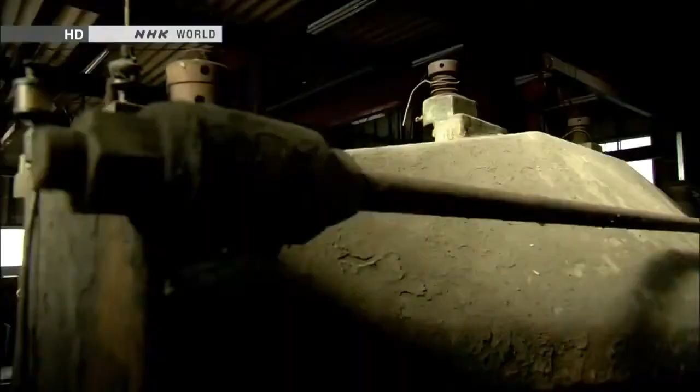The future is just around the corner. In a workshop near Mount Fuji, a curious being has appeared. It's 3.8 meters tall and weighs 4 tons.

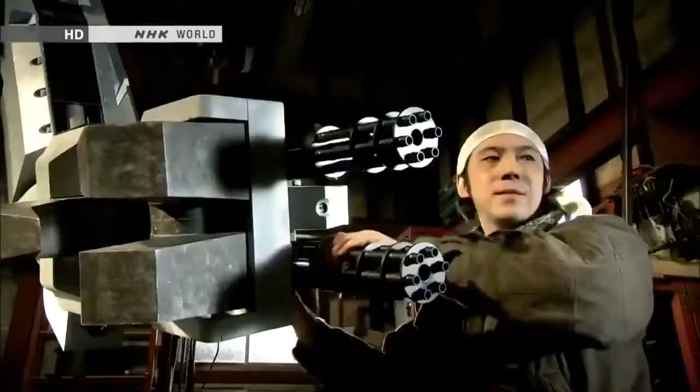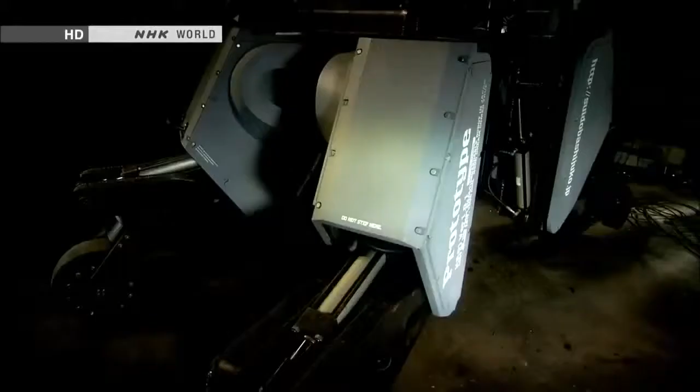It is a giant humanoid robot named Kuratas, a contemporary artist's creation. He holed up here for 2 years, building the robot with input from an expert. He calls Kuratas a work of art, but it's a sophisticated piece of machinery. A person seated inside can control the robot, move its limbs, and grab things. The artist says he was inspired by robots in science fiction tales and animation. That vision sustained him as he worked in solitude.

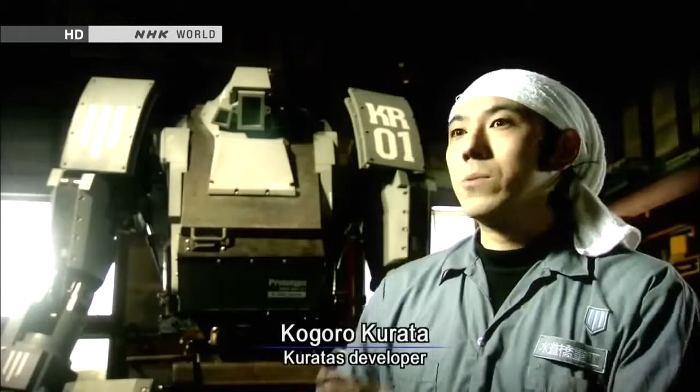Things that were once unthinkable are becoming real. How will robots evolve? Well, military applications could be one option. They'll probably become more and more like humans. They could surpass us in strength and ability.

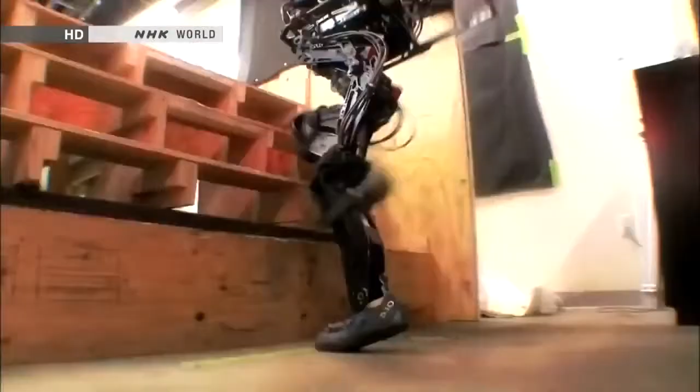People long dreamed of creating these extreme machines. Now, humanoid robots are here. They think like we do, move like we do, and even sacrifice themselves for us.

We want our robot to change society, because robots must be useful. Electronics and computing, progress in vision systems, there's many pieces of it. We will see much more capability continue to grow.

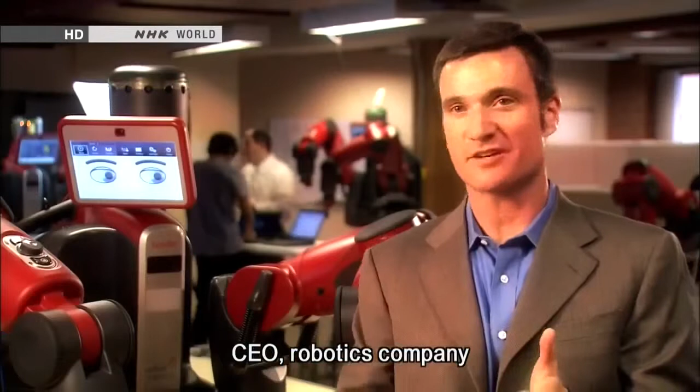Since the Industrial Revolution, people have entrusted some jobs to machines. But there may come a day when humanoid robots do much more complex jobs. Then, what will people do? You'll see more and more robots doing things in society, whether it's manufacturing, service applications, or home healthcare applications. The key will be to skillfully divide labor between humans and humanoid robots.

The disaster that hit Japan in March 2011 accelerated efforts to develop robots with human traits. The Fukushima nuclear accident left people powerless. Robots can take over when things become dangerous.

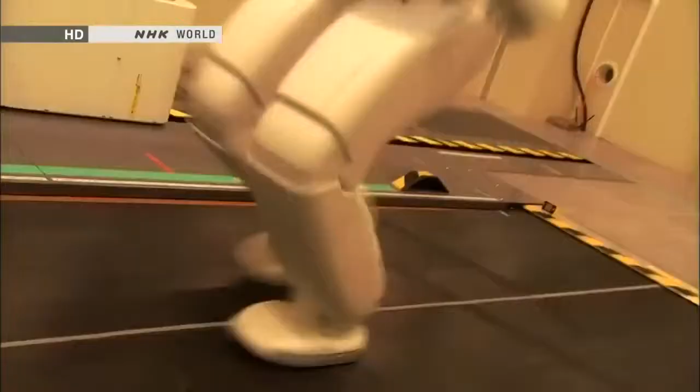They can plow through rubble, climb ladders, even make repairs. People are turning to humanoid robots to handle all of these tasks. We're eager to launch it soon to end the crisis. By joining forces, we can make a truly useful contribution.

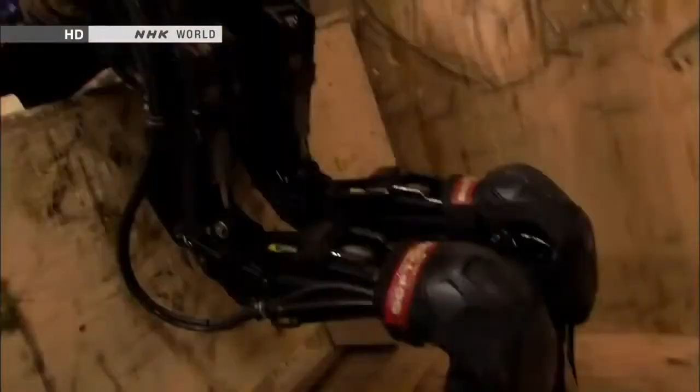Only a humanoid could do it. The day will come when robots will really assist mankind. The nuclear disaster in Japan sparked explosive advances in humanoids at the front line of robotics development. This program explores the future that's fast approaching.

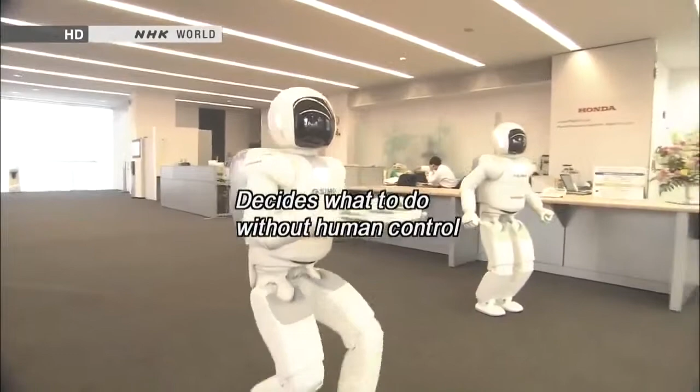ASIMO was created by Honda's research and development subsidiary. We were allowed to film their top-secret robotics laboratory.

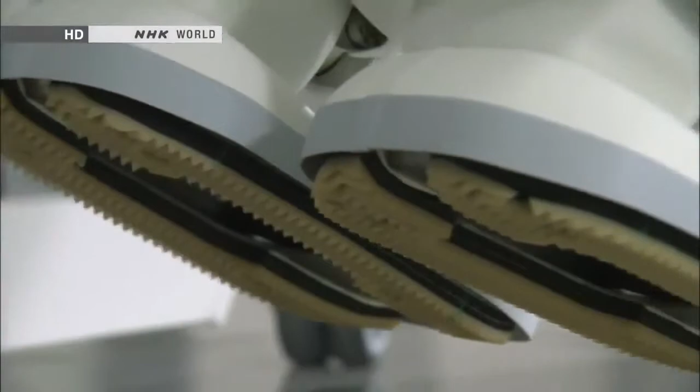Japan is a worldwide leader in the development of humanoid robots. ASIMO is the country's crowning achievement. Engineers continue to make improvements.

ASIMO's most innovative feature is its advanced intelligence. The robot can think and act on its own without human intervention. That's made possible by sensors that replicate our 5 senses.

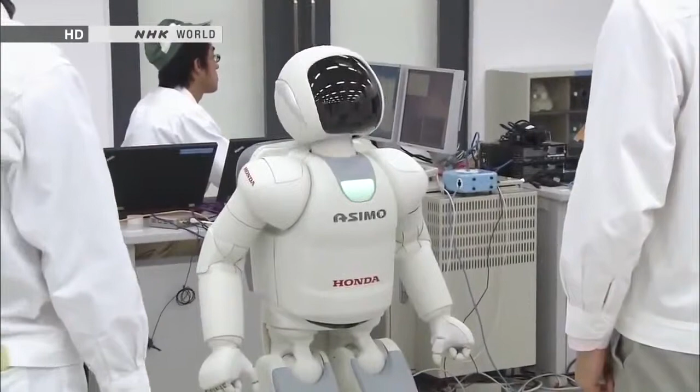ASIMO's head contains 8 microphones. It uses them to listen and engage in conversation.

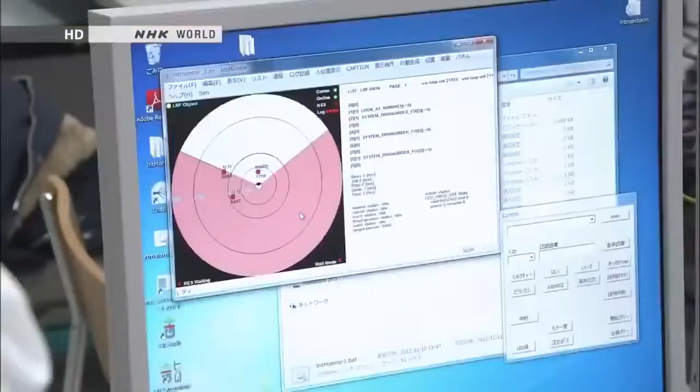ASIMO's artificial intelligence analyzes a vast array of information. That's how it understands people's requests and takes appropriate actions.

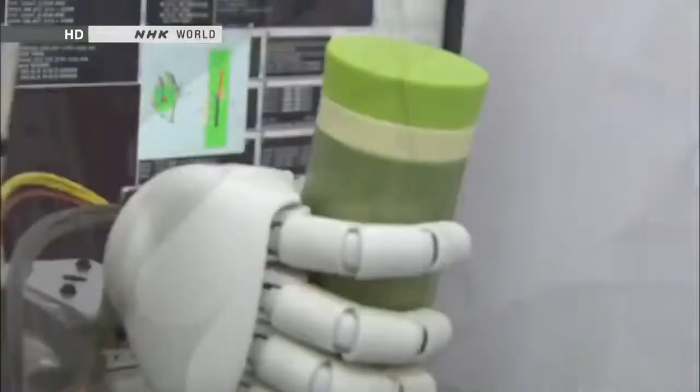ASIMO also has a sophisticated sense of touch. Its fingers can make subtle movements, like a person's. Sensors are embedded in the fingertips, too. They can gauge the hardness of an object, like human fingers do.

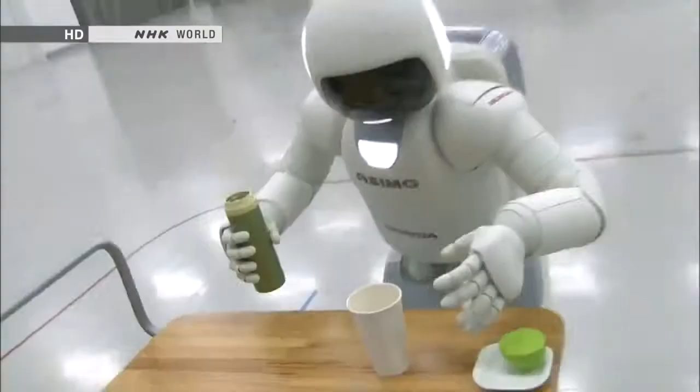Most robots use a fixed amount of strength to grab things. But ASIMO exerts more power to open a tightly sealed water bottle and less when holding a paper cup. Its artificial intelligence uses information from the fingertip sensors to adjust the grip.

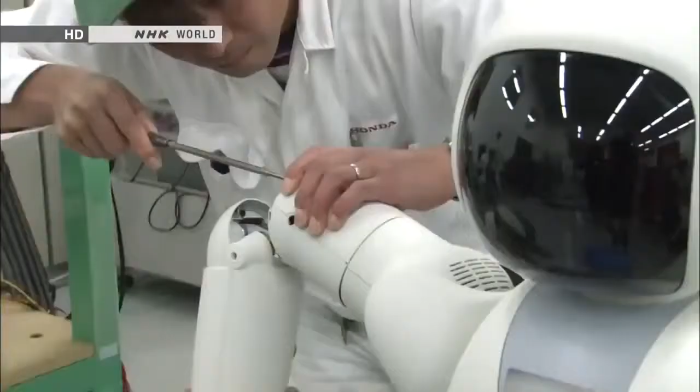The developer's ultimate goal is for ASIMO to be a valuable partner that coexists with humans. The engineers who created ASIMO all grew up watching animated shows about robots, such as Astro Boy, Doraemon, and Gundam. They dreamed of someday making their own.

Satoshi Shigemi is the development team's leader. He has been designing robots for the past 16 years.

From the beginning, we wanted to design a robot that could help people. To realize that dream, we're constantly asking ourselves, what kind of robot would be able to change society, make people happy, and make life easier for people around the world? Our idea is to create a robot that will change how people live. We're working through the technological issues, one by one, in order to reach that goal.

ASIMO's advanced physical capabilities are revolutionary. The robot can walk and run. It can reach speeds of up to 9 kilometers an hour.

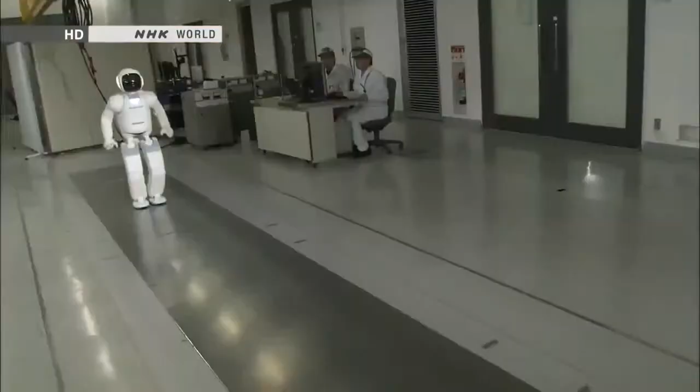For robots, walking is much easier than running. When running, both feet momentarily leave the ground. Balancing in mid-air is no easy task.

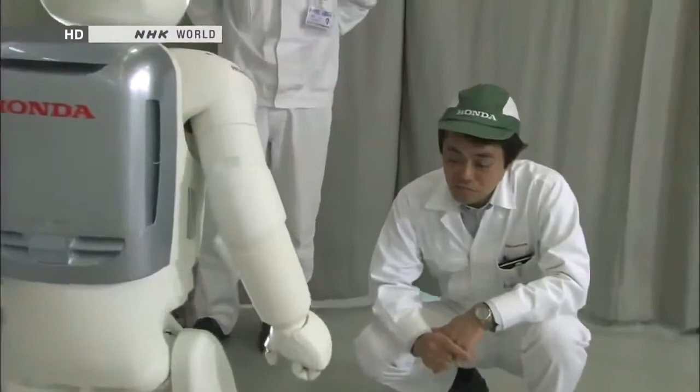Maintaining posture while jumping or floating in the air was a major technological breakthrough. ASIMO leans its upper body slightly forward to maintain overall balance, and goes forward straight in the air.

Sensors in ASIMO's waist measure the robot's angle. It leans slightly to compensate, forward or back, side to side. That's how it stays perfectly balanced in the air.

ASIMO has been evolving ever since development began in 1986, much like a growing child.

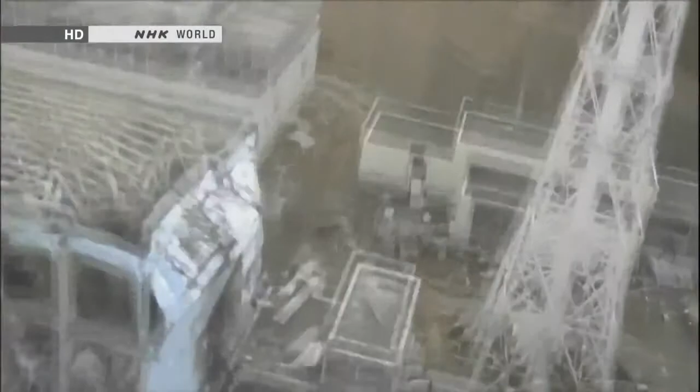But something happened that made researchers realize ASIMO's real-world limitations. It was the accident at Tokyo Electric Power Company's Fukushima Daiichi nuclear plant. The damaged reactors released radioactive substances, making it difficult for humans to deal with the crisis. People needed something that could confront the dangers and bring the plant under control.

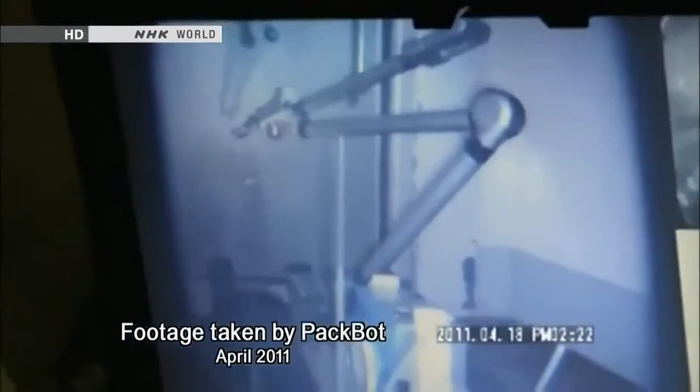Robots. Japanese officials sent a request for robots developed by the US military. The robots were sent to Fukushima in April 2011. They recorded images inside the damaged reactors.

Since then, a variety of Japanese robots have been enlisted as well. Robots have proven to be useful, but two years after the accident, they're only used for inspections. They're not able to do all the work of humans.

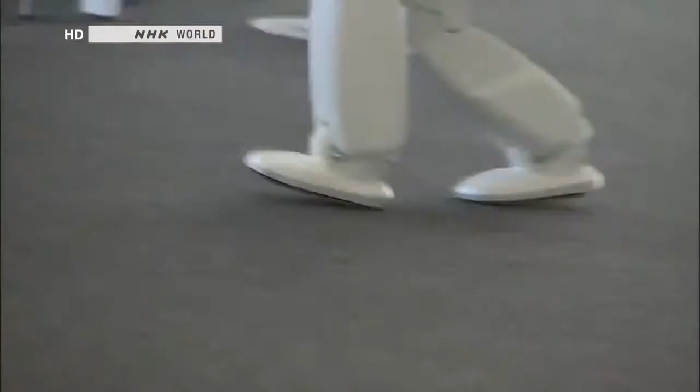What about ASIMO? Right after the disaster, people flooded Honda with phone calls and emails asking the company to send ASIMO to the Fukushima plant.

But ASIMO wasn't up to the task. It could move nimbly over an office floor and other flat surfaces, but large vertical gaps and obstacles were a different story.

We heard from many customers. We ourselves regretted that ASIMO couldn't be of help. It was obvious that the ASIMO we had built wasn't ready for real-life action. We realized right away that we needed to make something different, something new that could offer immediate assistance.

Honda wasted no time. Company officials offered to create a robot free of charge to assist TEPCO in the recovery. TEPCO accepted, and officials asked for a robot that could open or close valves inside the nuclear plant.

We wanted to flush out radioactive materials that remained inside the pipes and bring down radiation levels in the facility. That was our first goal.

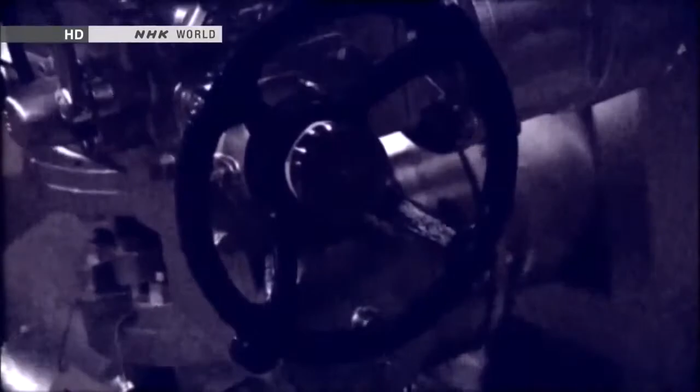Unless we opened or closed the valves, the area would remain highly radioactive, and that would prevent workers from entering the facility, and impact the entire decommissioning schedule.

How many valves are there? Each unit has from several thousand to tens of thousands of them.

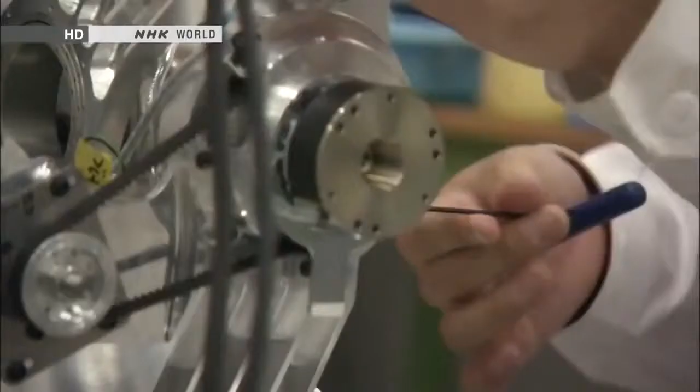In July 2011, four months after the accident, Honda began designing a robot for use at the nuclear plant. Members of the ASIMO team were put in charge of the project. A humanoid robot would take too long to build, so engineers focused on making a robot specifically for operating valves.

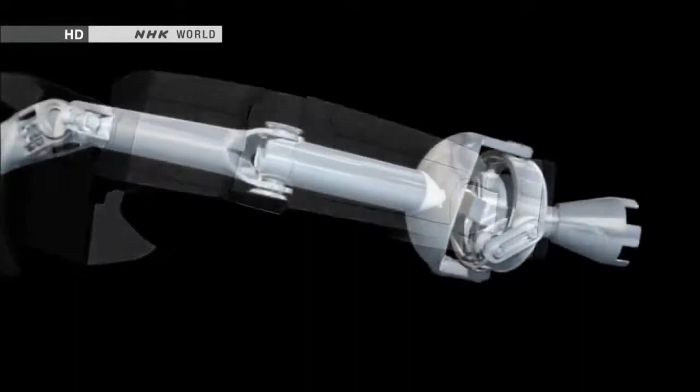ASIMO was crucial to their efforts. Its ankles employ advanced balancing technology. Developers reasoned that using it would allow the new robot to work inside rubble-filled reactor buildings.

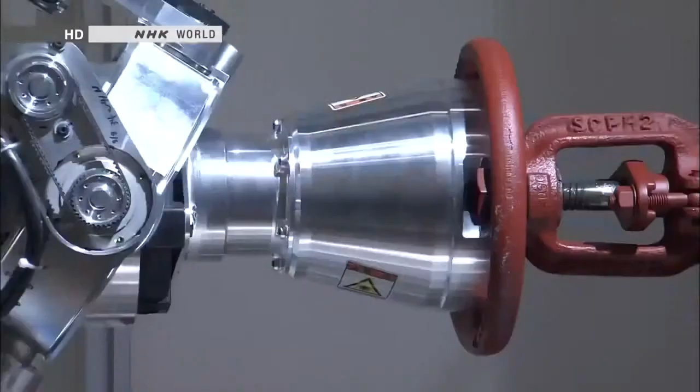The team worked exceptionally fast, completing a prototype in just four months. They turned ASIMO's leg into an arm for operating the valves.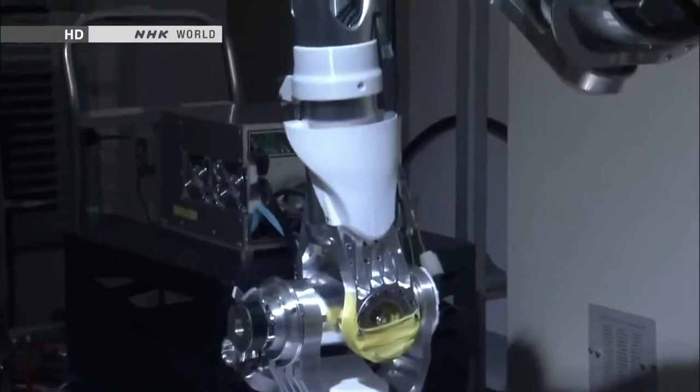Even when the base moves, the arm remains steady. So far, so good.

Officials from TEPCO evaluated the prototype at the National Institute of Advanced Industrial Science and Technology. The government-backed group for cutting-edge research contributed to the development effort.

A TEPCO official couldn't take his eyes off the robot's movements. We may be quite demanding. That's okay. We might be quite direct.

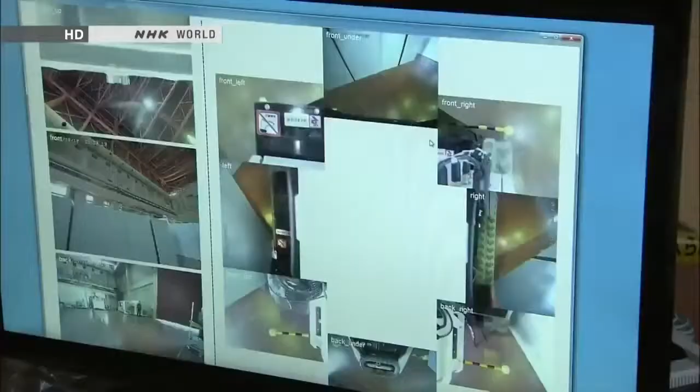The test is designed to replicate conditions inside the nuclear plant. The robotic arm is remote controlled. Testers send the arm toward one of the valves.

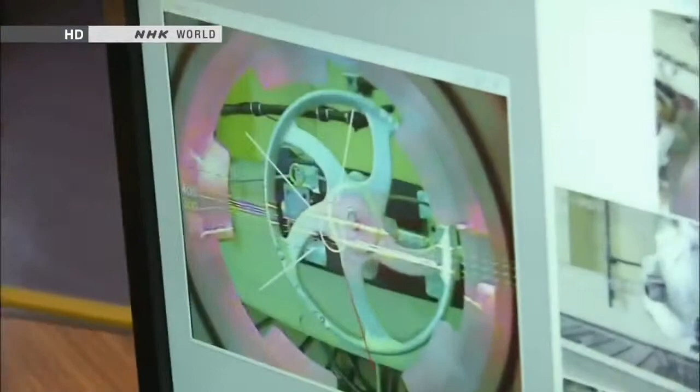There are a number of unknowns, including the condition of the valves. They may have rusted since the accident. A valve might break if the robot applies too much force, or it might not budge at all.

The robot uses just the right amount of force and turns the valve on the first try. It's passed the test.

This robot can do more than inspections. It could help in the recovery effort.

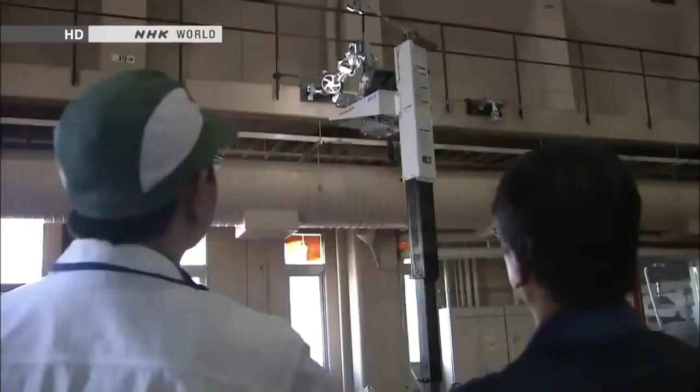From what we've seen, the robot seems near perfect. We want to use it as soon as the need arises. It's important that we quickly do what we can to make that possible.

The Fukushima accident also encouraged U.S. developers to design emergency response robots. Department of Defense officials have spearheaded the effort. Before, they had shown little interest in humanoid robots. Now, they view them as vital for disaster response.

The architect of the new strategy is Gill Pratt of DARPA. He oversees funding for leading-edge research at the Department of Defense.

There are many aspects of disaster response in Fukushima that inspire people in robotics to work on new capabilities. If they were able to take action during those first 24 hours, then the first reactor maybe would not have blown up in an environment that is too dangerous for a person to do.

What's important to us is that the robot is compatible with human environments, compatible with human tools, and also compatible with human operators without special training. As a result of that, the easiest form that comes to mind is the human form. DARPA is backing the development of a humanoid robot for catastrophes, such as nuclear power plant accidents.

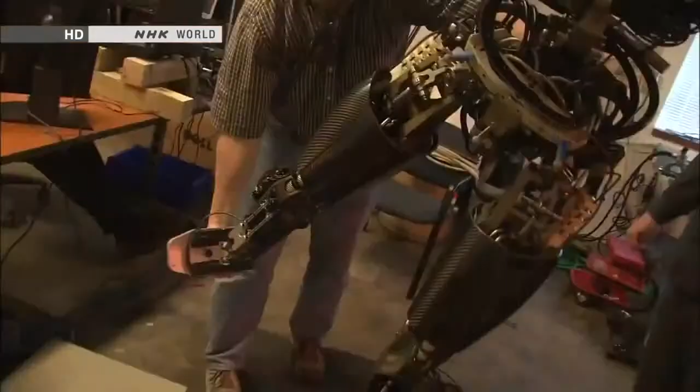This is the first American-made humanoid robot for disaster response. It's called Atlas. Before, U.S. designers had focused on robots with specialized functions.

Why the sudden interest in humanoid robots? Traveling over debris, prying open valves, using tools for repairs. Performing multiple tasks like these is impossible for specialized robots. Crises also require robots that can navigate doors and stairs. Humanoid robots are ideally suited for such situations.

Tests of this prototype were going smoothly. It can easily climb stairs and jump from a height of nearly 1 meter. It can negotiate obstacles using its arms and legs. It can already handle more demanding environments than Asimo can.

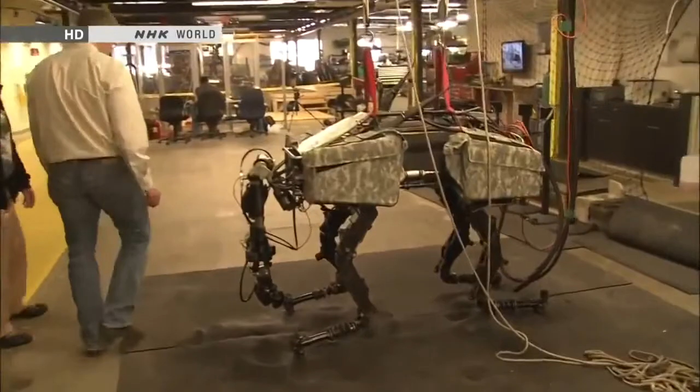Atlas is loaded with technologies originally designed for military robots. A quadruped robot called Cheetah can race through a battlefield at 50 kilometers an hour. LS-3 is for transport. It can carry heavy supplies for soldiers.

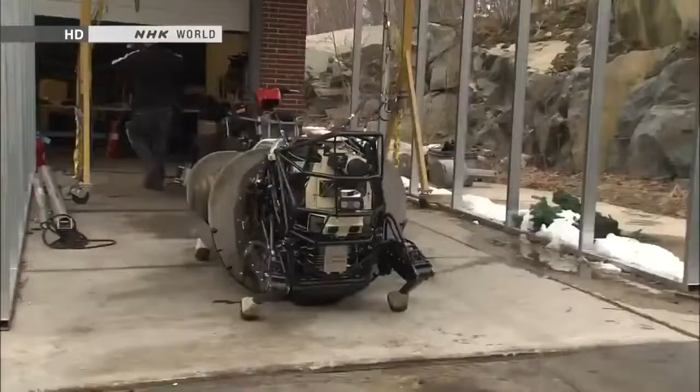The ferocious-looking robot gets its strength from a powerful hydraulic drive system. A hydraulic device can be small, yet quite strong. The black cables convey hydraulic power to the legs. That generates the brute force required for harsh conditions on the battlefield.

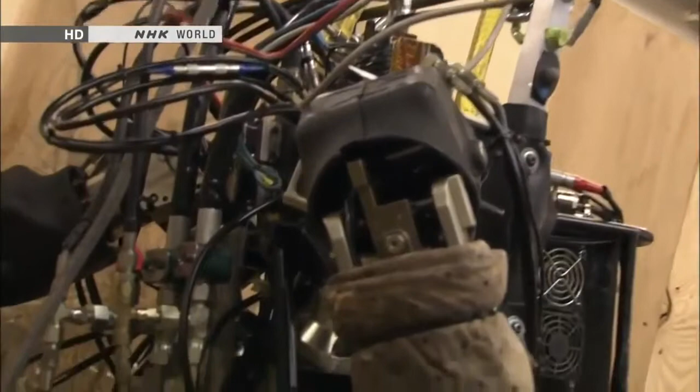A web of hydraulic cables covers Atlas's body. They form a muscular suit of armor for clearing debris.

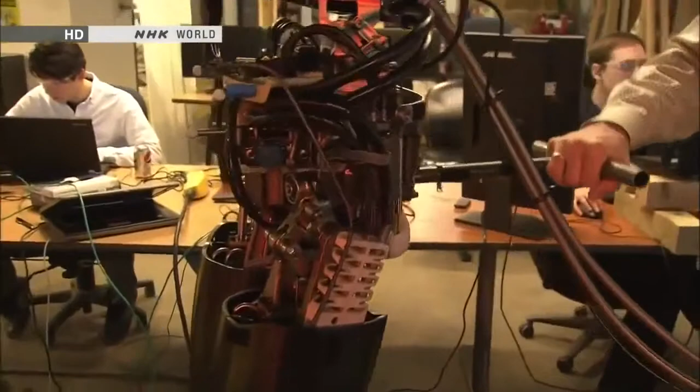Another important technology comes from military robot engineering. This machine's joints have a wide range of motion. They allow for flexibility that humans can't achieve. Atlas's joints are capable of moving in 28 different ways. Atlas can crawl through narrow spaces and withstand sudden shocks.

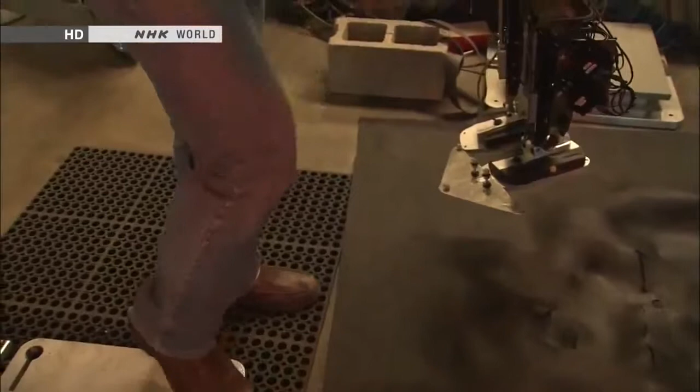But then we have the knee. This has 3 in the hip, just like us. This way, and then this way. I am very impressed with the number of degrees of freedom. It will be able to do these human-compatible tasks without a lot of the limitations that other robots have.

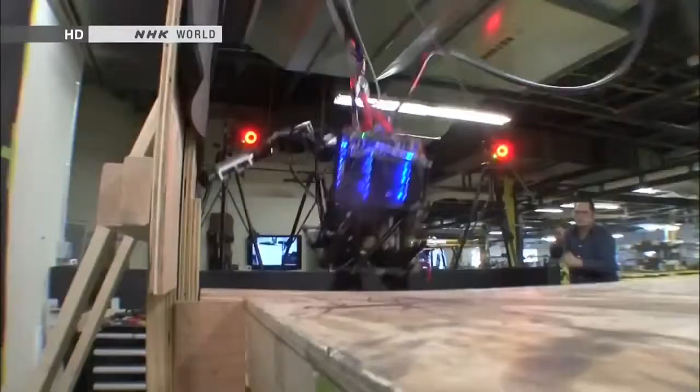Engineers will combine Atlas's rugged body with sophisticated artificial intelligence that's almost near completion. They aim to complete the robot by December of next year.

One reason you see humanoid robots is because there's some people working who are really interested in robots as an entertainment thing or as a performance thing. I think that's different. We're much more interested in basic capabilities for emergency response, rescue. So I don't think Asimo has been designed to do those things yet.

U.S. engineers stepped up their efforts to develop humanoid robots after the nuclear accident in Japan. Japanese researchers are embracing the same mission.

In November 2012, robot engineers from around the world gathered in Osaka for an international conference on humanoids. Gil Pratt from DARPA was one of the participants.

He came to invite engineers to join a project sponsored by the U.S. Defense Department. Okay, March 11th. After 24 hours, if only a robot had been there to go and open that valve, the entire disaster could have been averted. But we didn't have one. And furthermore, we didn't have anyone that could do the job. So shortly afterwards, we actually started planning the DARPA Robotics Challenge.

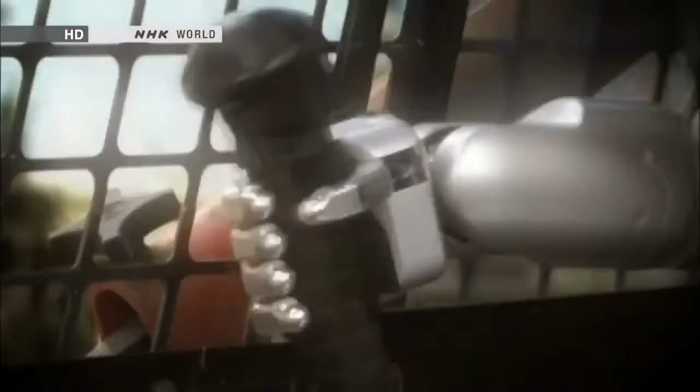The challenge consists of 8 tasks: driving a vehicle to approach a disaster site, walking over rubble, removing obstacles, opening doors, using tools to break down walls, climbing ladders, turning valves, and making repairs.

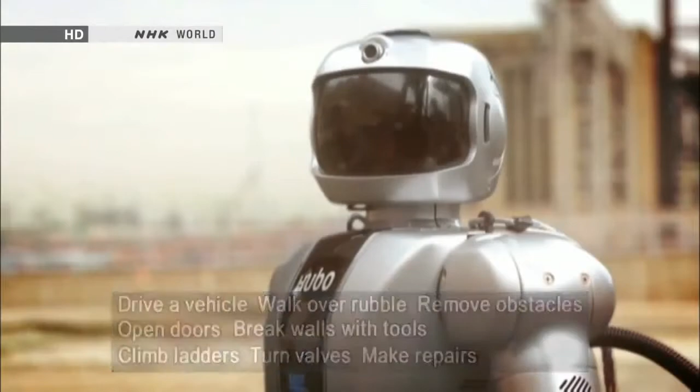A single robot must complete all 8 tasks. The development period is 2 years. DARPA will provide contestants with funding of up to $4 million.

DARPA has received over 100 proposals from research groups worldwide. They include renowned organizations like NASA and MIT.

Japan is at the forefront of humanoid robotics engineering, yet its researchers hesitated to throw their hats into the ring. So actually, to me, it's difficult not to see that some of the results of DRC are going to be used to advance, as you say, advanced military technology. The DRC is about developing robots that I believe wholeheartedly are completely impractical for military purposes, for offensive military purposes.

Will the technology that we come up with find its way into military systems? Probably yes. But I guarantee you that if you work on a robot for healthcare, there's a chance that that technology will also find its way into military systems.

The members of one Japanese research institution wanted to take part in the competition.

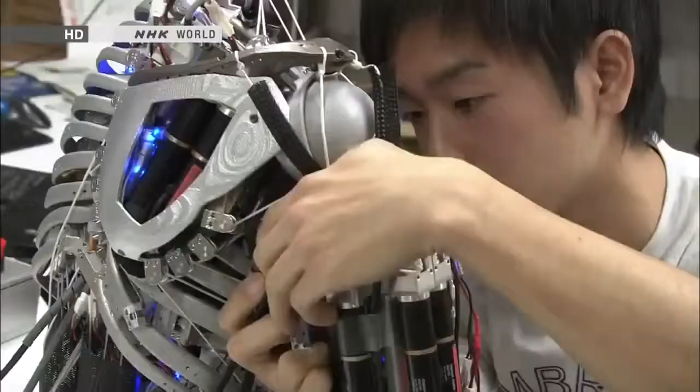They worked at the University of Tokyo's robotics lab. Researchers there, along with those at Honda, are global leaders in robotics engineering. But they faced a major obstacle to competing: the university bans military-funded research.

Three researchers made a decision. They told the university they were leaving. Then they decided to set up a venture company and enter the DARPA Robotics Challenge. They couldn't shake the feeling that they should leave their quiet university lab and help resolve the nuclear crisis.

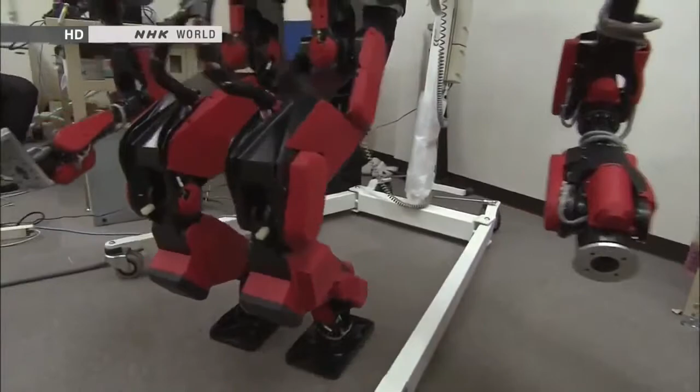Six months after launching their venture, the team had just completed a prototype with help from university graduates. Its long arms can exert 10 times more force than those of conventional humanoid robots. It's too tight to turn with one hand—but it can easily turn a valve that's too tight for a person to turn.

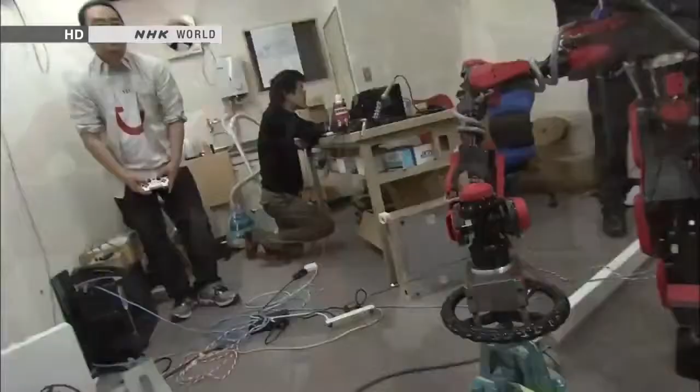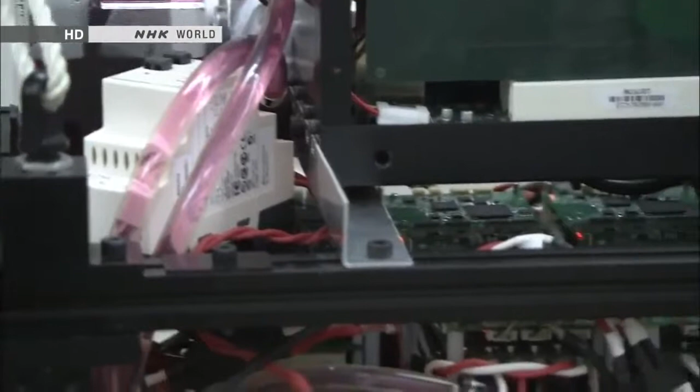The strong force comes from a large electric current that pushes the motors to their maximum limits. A reddish fluid circulates through the robot's body, serving as a coolant that keeps the motors from overheating. This cooling system should enable the robot to perform hours of grueling work at disaster sites.

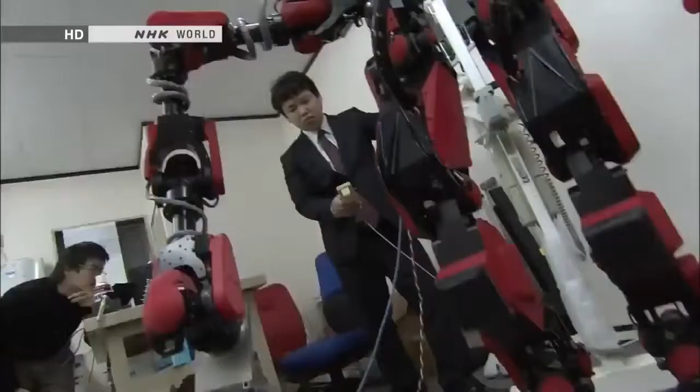The time has now come for the developers to apply their years of research to the real world. A nuclear crisis has happened here in Japan. Radiation is escaping. Researchers in every field must wonder at least once if the technology they've been working on could help resolve the crisis. By joining forces, we can make a truly useful contribution. It's with this in mind that we decided to enter the competition.

One country is quickly catching up with Japan in humanoid robotics: South Korea. KAIST is a government-funded lab for the advancement of science and technology. Researchers there were among the first to express interest in DARPA's Robotics Challenge.

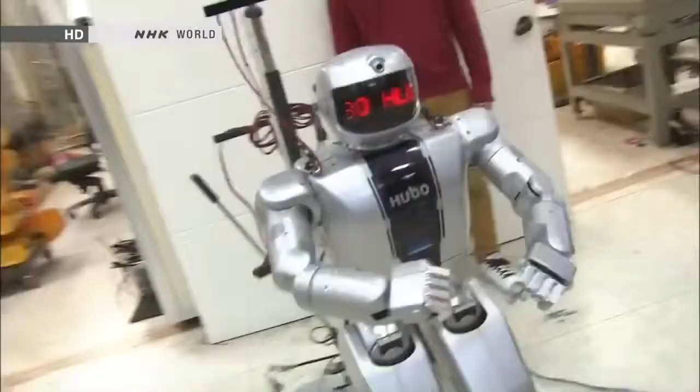This humanoid robot is called Hubo. It's modeled on Asimo, which Honda spent 14 years developing. Hubo was built in just 5 years. Hubo deftly manipulates its hands, and it's also good at dancing—its moves look just like Asimo's.

Hubo has been undergoing a major upgrade ahead of the competition. It can now bend backward at the waist while walking to handle all kinds of environments. It can quickly pick up tools. The tests were going well.

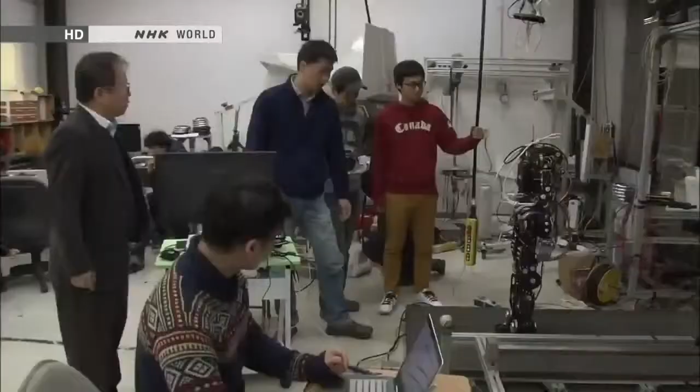People have always compared Hubo to Asimo. Engineers now had a strategy to get ahead of the Japanese developers: they decided to publish certain details about Hubo's design and pursue joint development with researchers at other institutions. One could say that this space inside Hubo's chest captures the heart of their thinking.

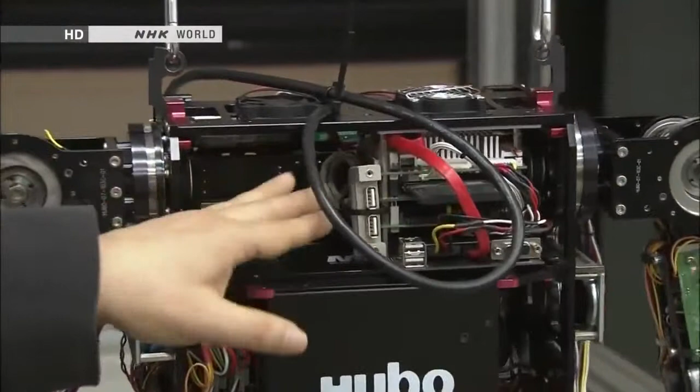It's empty now, but this is where artificial intelligence will be installed. It's removable. Hubo does not yet possess artificial intelligence. Its motions are as sophisticated as Asimo's, but Hubo's movements are all pre-programmed.

U.S. universities that lead research into artificial intelligence will develop a brain for Hubo. The stage has been set for a joint U.S.-South Korean team to compete in the DARPA Robotics Challenge.

Sharing is the key to making technological advancements. That's true in South Korea and in other places too. Research shouldn't be confined to one place. People developing humanoid robots elsewhere are too close-minded.

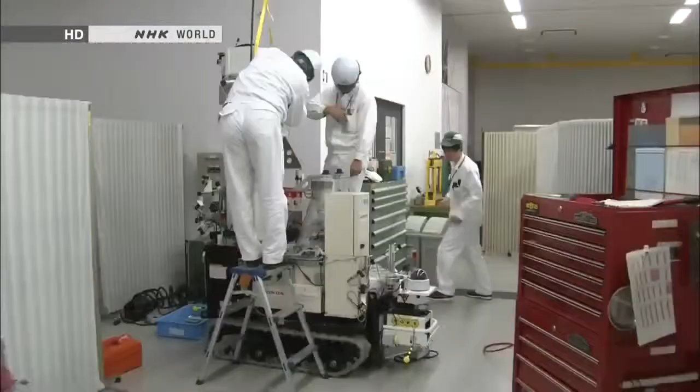Researchers at Honda were also invited to enter DARPA's competition, but they declined. Their energies were focused on designing a robot to tackle Japan's nuclear crisis.

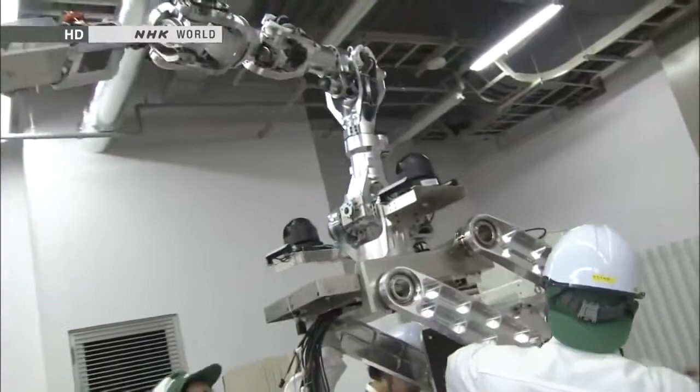Nearly a year has passed since Honda's robotic arm passed evaluation tests, but the device has yet to be deployed to the nuclear disaster site. That's because officials at TEPCO requested a change in specifications. Engineers have replaced the valve-turning hand at the end of the arm with a camera.

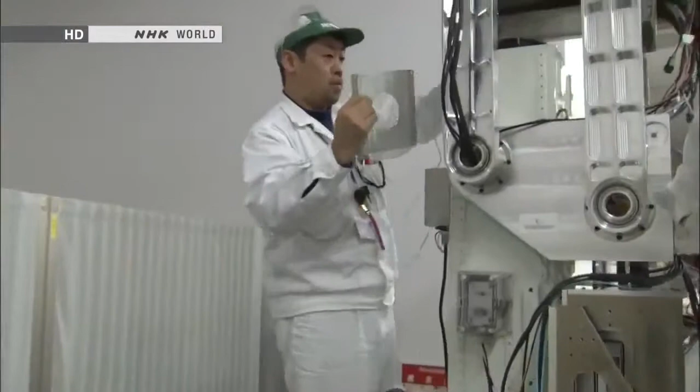TEPCO had changed its plan. Officials decided to put priority on assessing conditions inside the plant's facilities. They said it was too early to have robots work on valves. There wasn't even a recovery plan in place when we were working out the valve manipulation tasks.

Confusion also prevailed at the site. We were expecting valve work to begin 2 to 3 years after the disaster, but the timing has ended up being later than what we'd assumed just 1 month into the crisis.

The robotic arm will soon be sent to the accident site. It will provide the first images filmed from high up. The robotic arm was not the end of Honda's efforts—its engineers had another secret mission.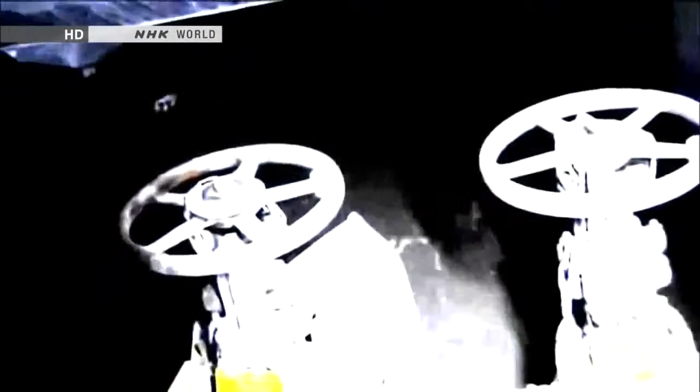They would develop a new humanoid robot, an updated version of Asimo for use in disasters. The site where the Fukushima disaster took place is dark and off-limits to humans. Only a humanoid robot with both intelligence and motor skills could climb over the debris, get to the accident site, and perform the work of people. In other words, a robot like Asimo.

Asimo's engineers were united by this idea: let's use our skills to make a humanoid robot that can tackle disasters. The robot they envisioned would not only walk, but also use its arms to crawl. It would use every means possible to reach its destination. A dramatic update would be necessary.

A disaster reduction robot would be useless if it couldn't get to the site. It's important to get to the scene no matter what. Disasters create all kinds of debris that crumbles easily or breaks when stepped on. It's because it's dangerous that robots replace humans. That's what makes them valuable. A robot that couldn't get to the scene would be totally useless.

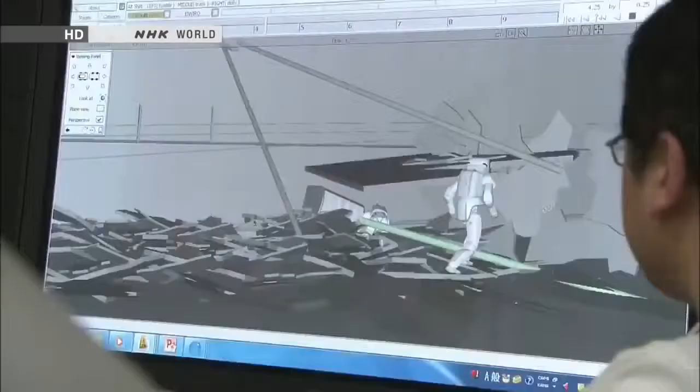Honda's engineers began developing robots in 1986 with the goal of making people happy. 27 years of research is now being put to the test.

As we saw in the Fukushima Daiichi crisis, the bottom line is that robots can stand in for humans in places that we can't go to or that are too dangerous. I am committed to delivering what's needed, when needed, in the shortest amount of time.

The accident in Fukushima spurred the development of humanoid robots around the world. The disaster also prompted people to question the roles of humans.

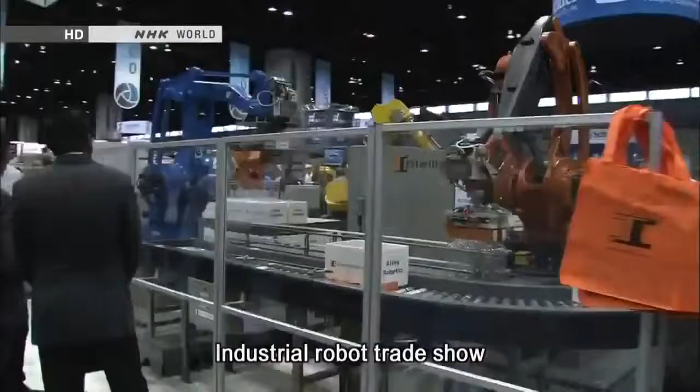One of the largest trade fairs featuring industrial robots took place in January. Global manufacturers displayed their latest models. Companies are developing more and more two-armed humanoids for industrial use.

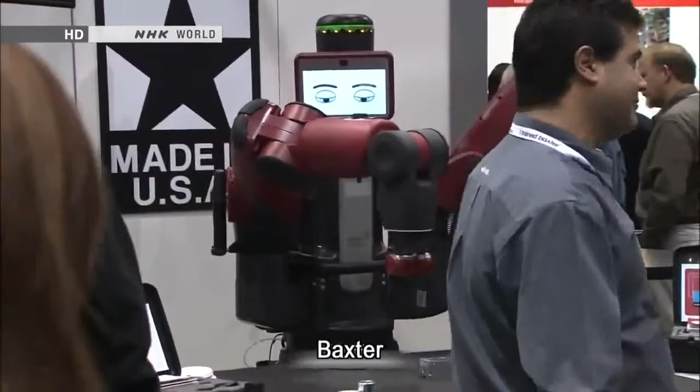One new product at the event caught a lot of people's attention. Baxter was created by the inventor of a best-selling cleaning robot. It's equipped with sophisticated artificial intelligence.

Baxter is designed to work side by side with people in factories and other settings. The robot's most unusual feature is its ability to master a task in a matter of 5 minutes. All that's required is step-by-step manual instruction. No complicated programming is needed.

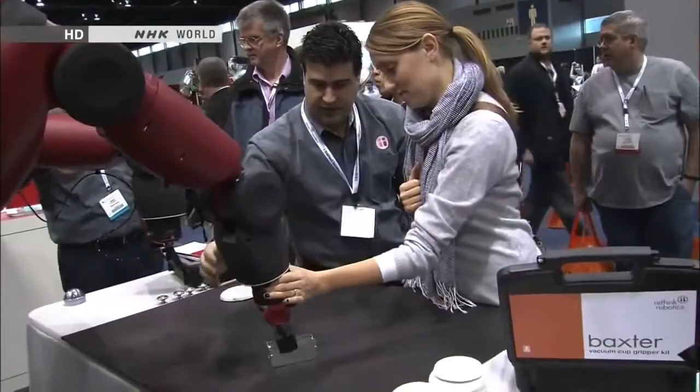Let's pick up this part. So you bring the arm to the part. Yep, just like that. So we have the part. Close the grasp. Yep. Grab the arm and bring it to the table.

So you just pick. I did a pick and a place. And at this point, you're already able to do the task. So if I can move that over there, it's going to look for the object.

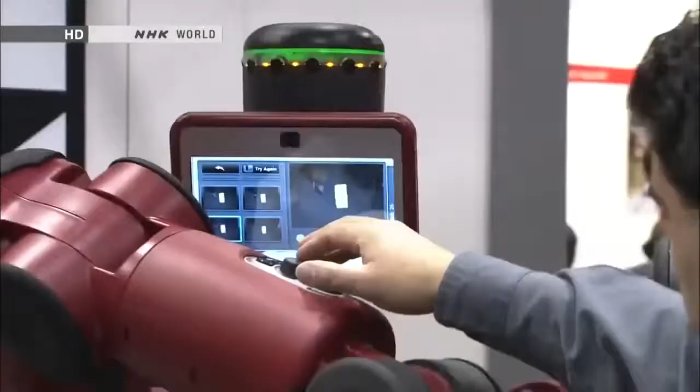The expression of the face on the LCD screen shows whether or not the robot has understood the task.

Baxter costs $22,000, a bargain for a humanoid robot. The maker says buyers can recoup their investment in several months and slash labor costs.

I'm very impressed with it. I work for a small manufacturing company, and we have some older employees who are looking to retire, and there's some tasks that Baxter could do for us very effectively. Plus, it would be cheaper than employing a person. It's not going to get tired. It's not going to need to stop. It'll keep running while everybody else is taking their lunch.

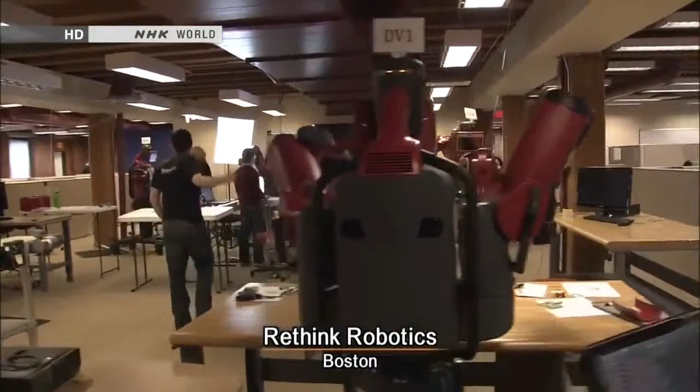The Boston-based manufacturer has a flood of back orders.

Officials say someday Baxter will work at places like coffee shops, taking orders and grilling burgers. Eventually, they expect to have 500,000 U.S. customers.

Today we're focused on manufacturing, and there's a very big opportunity in manufacturing, but there's lots of other places that a robot like Baxter could go. We had the Industrial Revolution at the turn of the last century. We've just gone through the computer revolution, effectively at the turn of the most recent end of the century. We're now into the robot revolution.

Will people and robots someday compete for jobs?

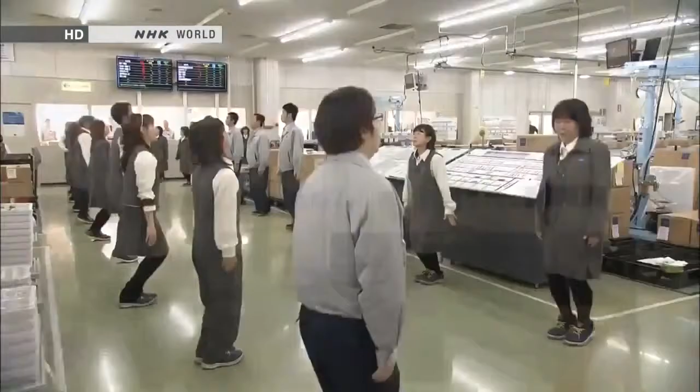At 8:30 one morning, a group of new employees takes part in daily morning exercises. They are 13 humanoid workers called NEXTAGE. This company began using the robots in earnest last year.

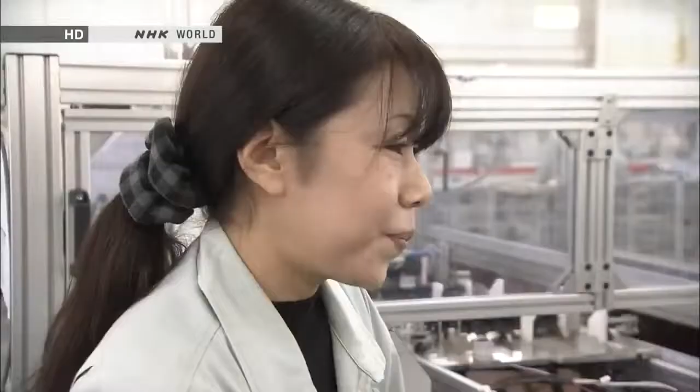They have 2 eyes and are just like humans. They're cute.

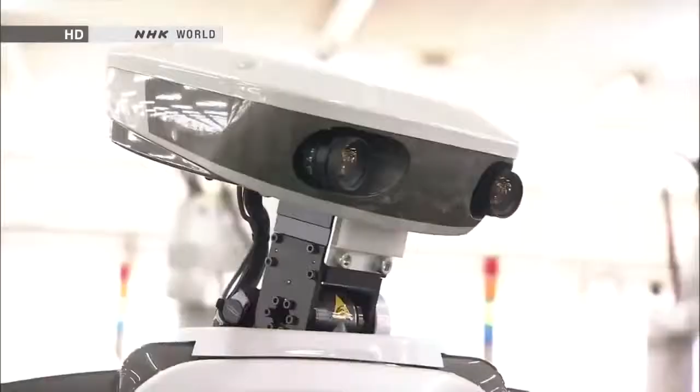This factory manufactures money sorting machines for cash registers. The humanoids work on a production line that was previously manned entirely by humans. The robot visually confirms the parts set in place by a human worker. Then it begins its task.